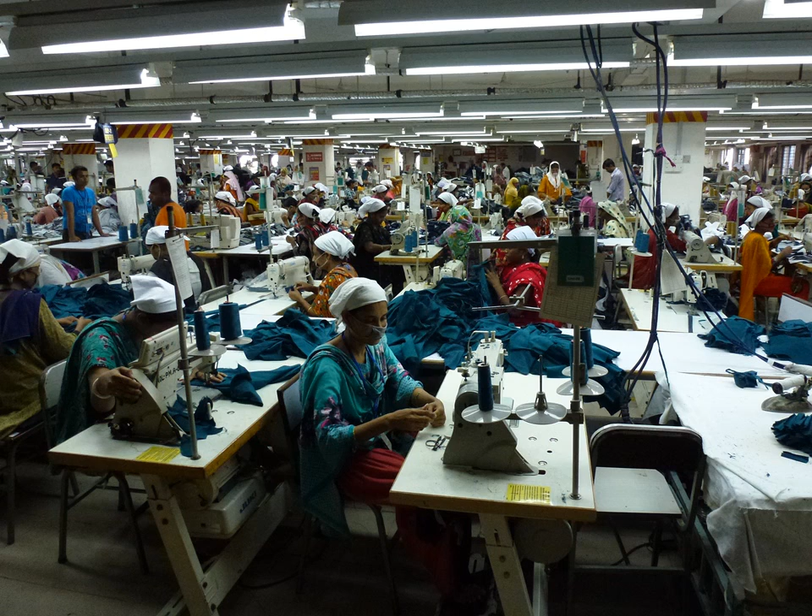The garment industry was seen by Bangladesh as a way out of the chronic poverty, and the development of that industry has really taken place at a pace which is quite phenomenal. It is now the second largest garment manufacturer in the world after China. Over 4 million people in Bangladesh work in the garment industry, mostly women. About 80% of the employees are women.

It has exports of 20 billion US dollars. So that represents 80% of the country's exports. So clearly the garment industry is absolutely fundamental to the growth and development of this nation. The biggest customer, if you like, for clothes from Bangladesh is Europe, at about 70%. The US follows after that.

Arup first became involved in Bangladesh at the end of 2012. There were a number of fires in large factories in Bangladesh, and one of our long-standing clients, Inditex, a Spanish garment company, asked us to give them some assistance and some advice on how they would go about carrying out fire assessments and assessing the evacuation from factories as a result of those fires. So we were working in Bangladesh just when Rana Plaza collapsed.

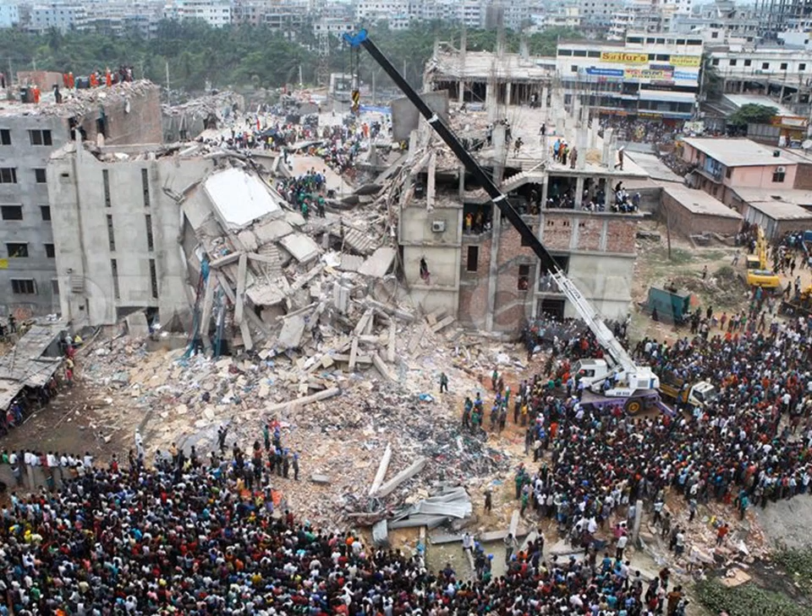So over 1,130 people were killed in the collapse, and clearly many thousands were injured. What you can see there is the remnants on the day after. You can see 4 stories. Originally that building was 9 stories. The top 5 stories were completely obliterated, and they were fully occupied during the collapse. Clearly it was a time of great chaos and mayhem and devastation for many people. It makes it one of the largest and greatest industrial disasters in the history of the world.

The building itself had multiple occupancies. At the lower levels there was a bank. In the days leading up to the collapse, there were reports of structural issues, and people heard loud noise like gunshots, and people became worried about the columns. Cracks developed in the columns, and some people were sent in to assess those. The bank workers were all sent home, and the garment factory workers were unfortunately all sent back into the factory.

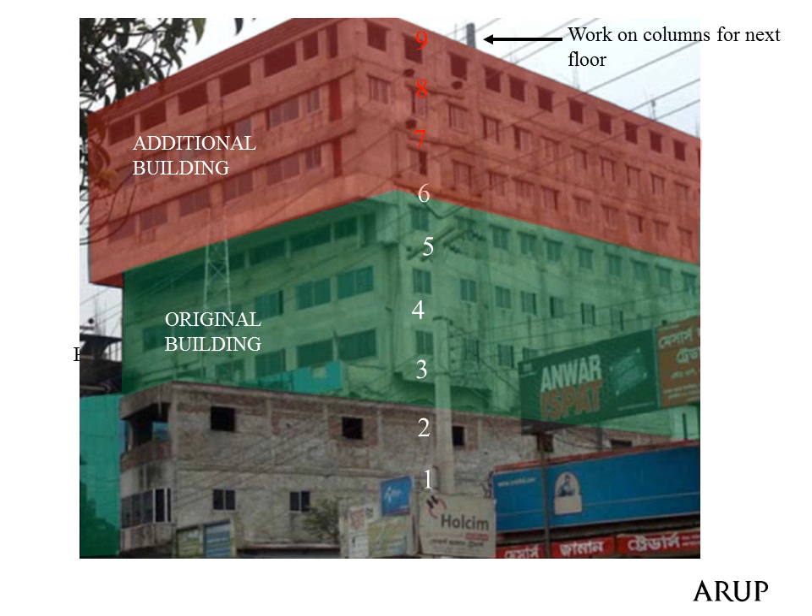So the response, and our first involvement in the structural issues, as I said, was through Inditex. You probably are familiar with Inditex through Zara and Massimo Dutti and lots of other shops that we see all over this country. And I think, as I said, they are probably the second or third largest company in the world in the garment industry.

And after the collapse in Rana Plaza, while we were already helping them on fire issues, they came to us and said, clearly we have a bigger issue here. It's not just fires. We don't know what is the structural condition of the factories where we are currently buying our garments from.

And the objective that they set us was to provide assistance. They weren't quite sure what it would be. They were very open that whatever we developed, whatever we found would be shared with all of the other factory owners and the other garment manufacturers. So we were very clear about that at the outset. And so they very much drove the agenda and the response in the post-Rana Plaza days.

Inditex were a founding member of what started off with the EU retailers, an umbrella organisation called the Accord. And it's considered by those in the know in the corporate social responsibility sphere that the reaction of the garment industry here in Bangladesh was a game changer. It hasn't been seen anywhere globally.

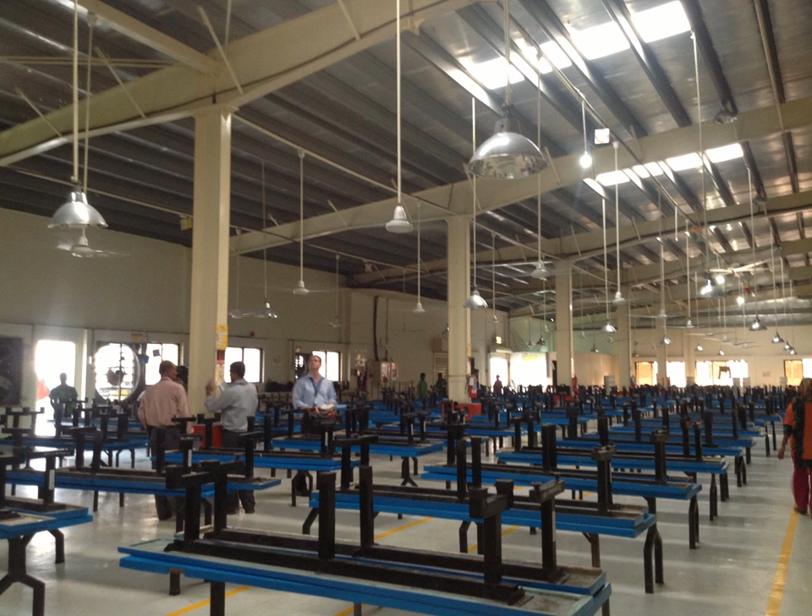There were some exceptions. There were some factories that were comprised of single or multi-story steel structures, and these were probably the exception. A very small percentage of factories fell into this category. But what we did find a bit more often was that on the roofs of RC buildings there were small, normally non-engineered steel structures. And as well as that, we found that adjacent to the main factory building there was often a steel structure that served as a warehouse or for more heavy industrial activities like the washing or the printing of linen.

So as we have seen, concrete is one of the major building materials of these garment factories, and as we began to dig into the construction of these buildings, what we found was that more often than not, brick aggregate had been used instead of stone aggregate, as we'd be used to in Ireland. And it happened for a number of reasons. One, because Bangladesh has very few natural quarries, and so a lot of the stone would have to be imported, which meant quite expensive. Another is that Bangladesh is part of the delta and had a lot of access to clays, which could be dried and fired in the kiln to make the bricks.

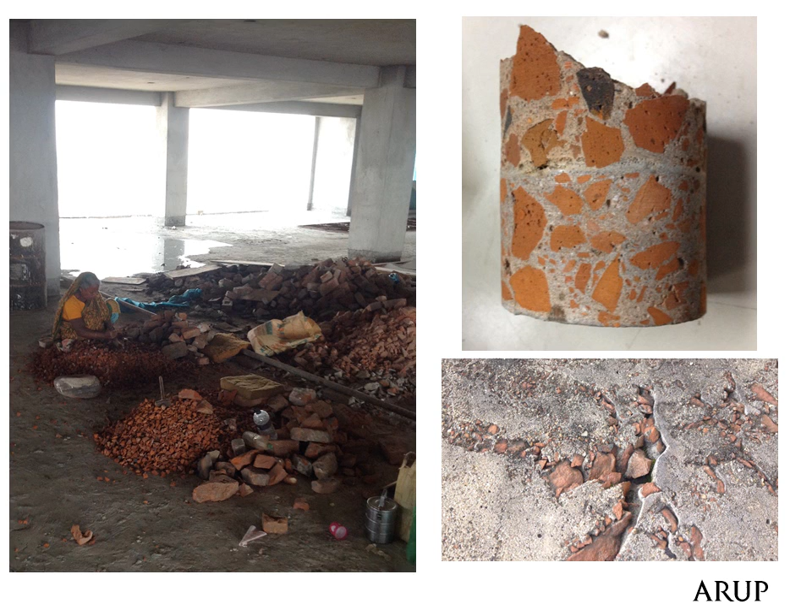Out of interest, the cylinder strength for a brick aggregate concrete was about 14.1 newtons per millimeter squared, and for stone was 16.3. So that was from our analysis, the statistical numbers that we came out with at the end. Obviously, as the project went on, we were able to revise our assumptions as we got more data from more buildings.

So our methodology then, as we developed our methodology, what we came up with was a visual plus survey. So this is mainly visual, but in addition to that, we did some calculations. What we thought was important in considering was everyday gravity load. We didn't review seismic loads because most of the buildings would have failed had we done that.

But what we decided was that columns were the critical element, for a number of reasons. Columns were the element that failed in the Rana Plaza collapse. Also, we felt that whereas beams and slabs can be a lot more ductile in their failure, columns can be quite brittle and give very little warning. So it was obviously of concern to us.

We developed a working stress methodology, and this is in line with international best practice. We were able to reduce the load factors based on the certainty that we had going into factories and seeing what was on the ground, measuring the exact depth of slabs and so on. Just to reiterate, we were really interested in the life safety of the workers in the factory. We weren't trying to make these buildings code compliant to any degree.

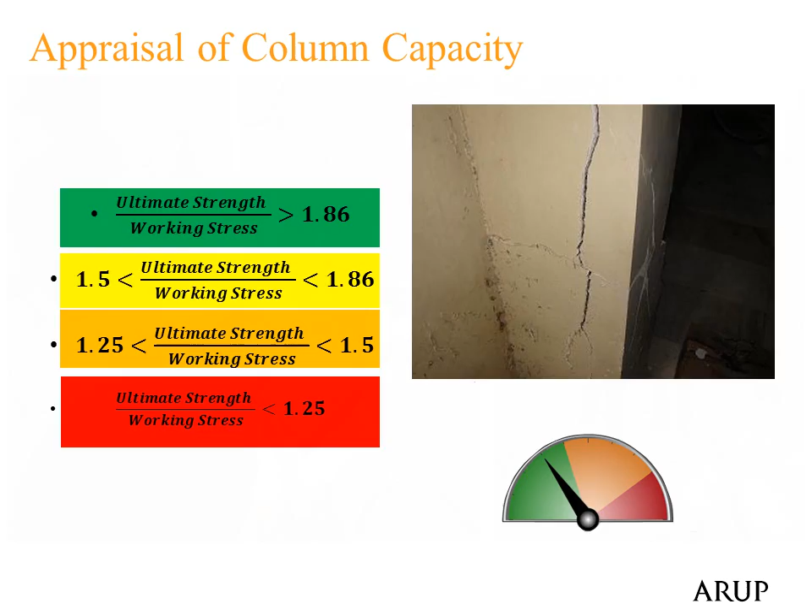So as part of the development of our methodology, we carried out some field tests on 6 factories in Dhaka. Initially, it was thought that about two factories could be surveyed each day with reports, and this quickly became very unrealistic given the traffic jams, the difficulty finding factories, and just the sheer size of some of the factories. But as we surveyed 6 factories first, we were able to upgrade and refine our methodology.

So just to talk a little bit about some of the tools that we used while we surveyed the buildings. We had a specifically designed RF Inspect app for the project in Bangladesh. This is an iPad-based data gathering tool. It basically allowed us to record all of the information that we found at one of our visits to the factories. It was particularly useful in that we were able to take pictures of floor plans and then locate pictures and notes to certain parts of that floor plan.

It was very useful because, as you see in the next couple of slides, we were doing quite a few surveys per week, and after a couple of weeks out there, they did all seem to blend into one a bit. So it was very useful to have something like this to keep it clear as we went to write the reports.

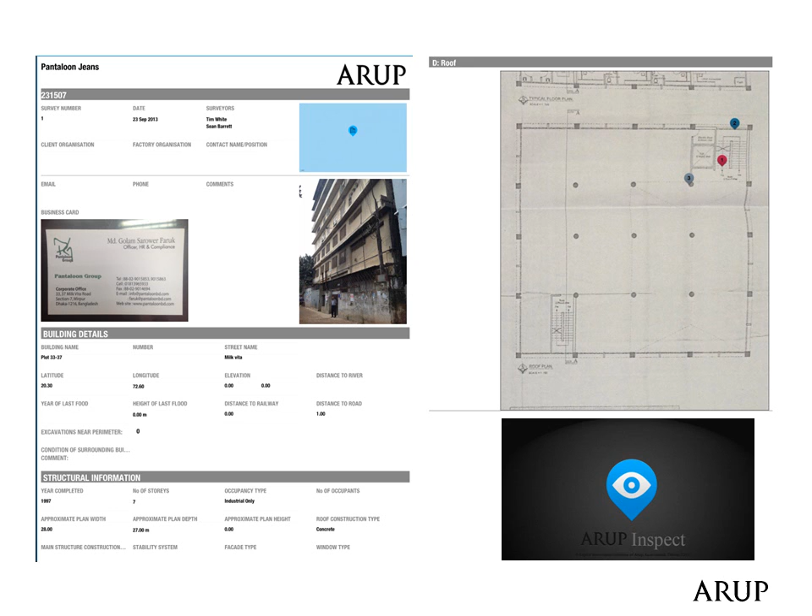So the colour coding, as we spoke about, fed into the overall colour assessment for a particular building. So the columns were one part of the colour coding, and anything else that we found from our visual inspection would have fed into this colour coding as well. So we came up with a kind of traffic light system whereby if we deemed the factory to be red, the factory must be closed immediately.

Amber was immediate action required on some part of the building, for example, empty water tanks or remove high loading from cantilevers. And yellow was some action within 6 weeks, and green was normally that the building is generally okay, and maybe some longer term maintenance issues that we wanted to be addressed.

Another tool that we had at our disposal was to call for a detailed engineering assessment, which we generally called for if the colour coding was amber or red. We called for a DEA, and this was a more in-depth study and analysis of the building, normally carried out by a local engineer.

But I suppose at the heart of the methodology was that this is a very pragmatic approach to the situation in Bangladesh. The objective was to prevent another Rana Plaza, and we couldn't go in and condemn every building based on code compliance; it would have a disastrous effect on the economy, which is vital to the prosperity of Bangladesh.

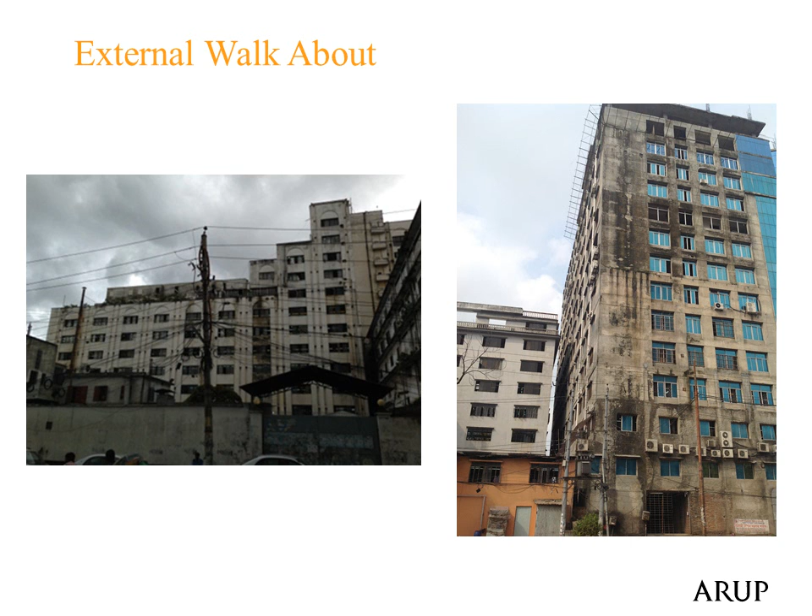We then proceeded to go up to one of the meeting rooms and have an interview with the factory manager. We generally did have to maintain a bit of a healthy skepticism for what they told us. Often they were trying to tell us what they thought we wanted to hear, but nonetheless we found it very useful. A lot of them would have been around during the construction of the building.

We also asked for any documentation that they had, so any permit drawings, structural and architectural drawings, site investigations, and so on. We got a big variation in what we received. In certain cases, we were handed a perfect set of structural drawings and the building was exactly as drawn. In other cases, the bay dimensions might have been the same, but there might have been a couple of extra bays or a couple of extra stories. And in other cases, we were given plans for a different factory down the road, so they were not quite as useful.

And again, in terms of site investigations, I was handed one one day that was dated the day before the survey took place. So we had to, again, just maintain a bit of skepticism.

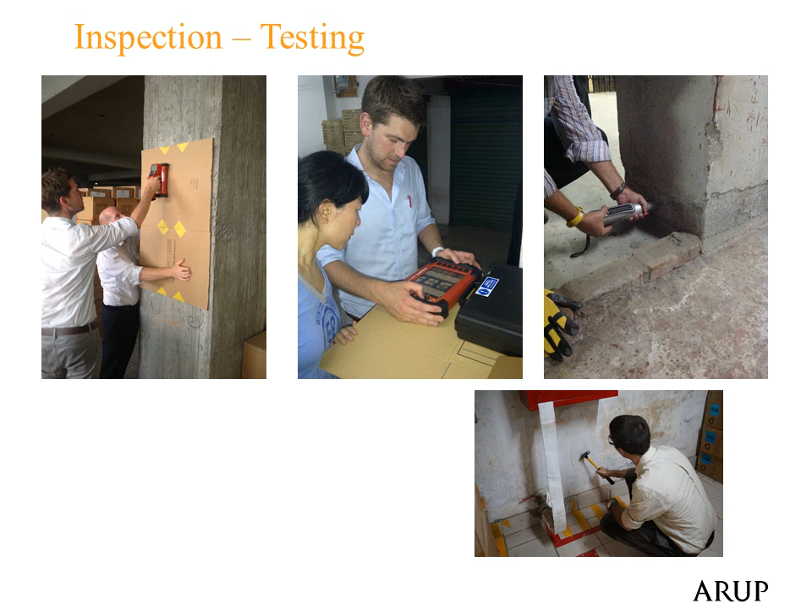So it was very important to us that these were very graphical presentations or reports. They are all available now on the Accord website in English and Bengali, so anyone with access to the internet can go and read them. And we wanted to make sure that if any layperson or non-technical person went in to look at these reports, they would be able to understand what the critical issues were.

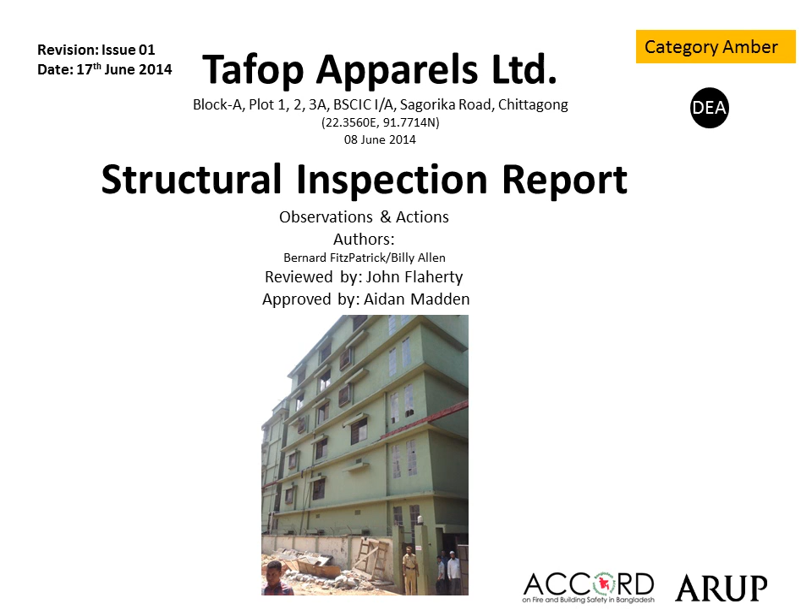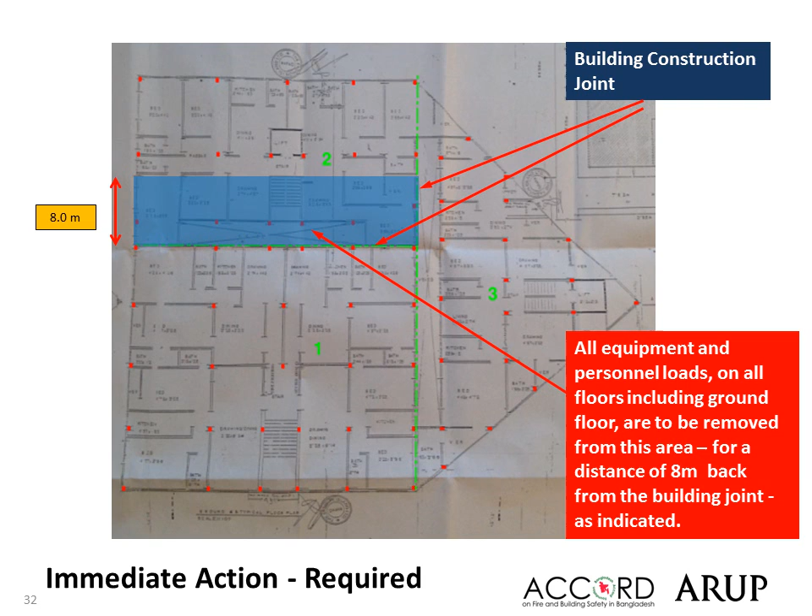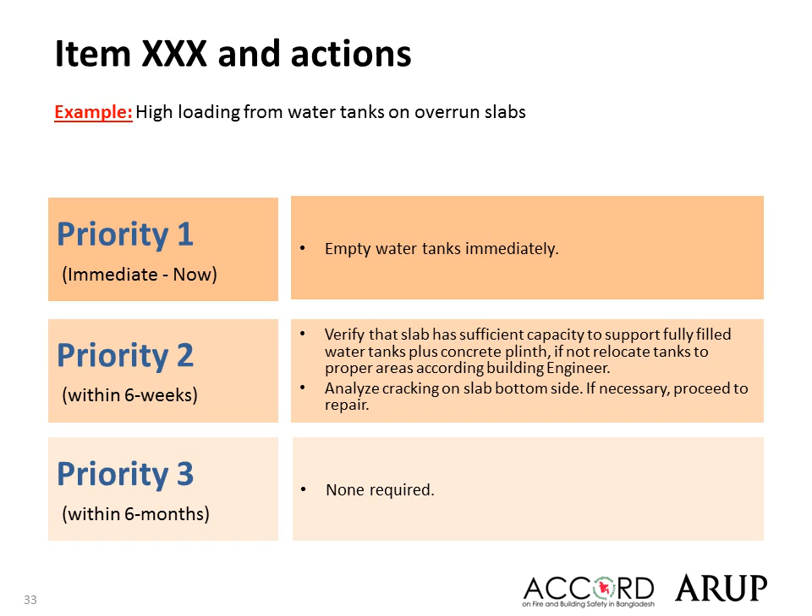So I'll pass back to Ed now to go through what we found from the project and finish up. So just to recap on the timeline, as I said, it's 2 years now since Rana Plaza collapsed. In that 2-year period, as Shane said, pretty quickly we were involved in developing the methodology. So that was in the summer of 2013.

We then went on to do around about 120 surveys for Inditex at the end of 2013, just into the start of 2014. We were then appointed by the Accord at the start of last year. And from March until July, we carried out 458 factory surveys for them. And we're currently finalising a final tranche of factories for them now. Up to today, it's 172 factories between January and today.

So it's about 750 factories that we've surveyed, that we've walked around, that we know a lot more about now than we did before. And it's been very interesting. It's unusual for us to gather so much data and to create such a big data set. And we've learned a lot from it.

And so in terms of the findings, what this shows is the overall color coding. Just think of the color coding as urgency levels, because it's all time bound. So red factories are factories that needed to be closed. Out of the factories that we surveyed for the Accord, just under 2% of those factories needed to be closed. So that's 11 factories.

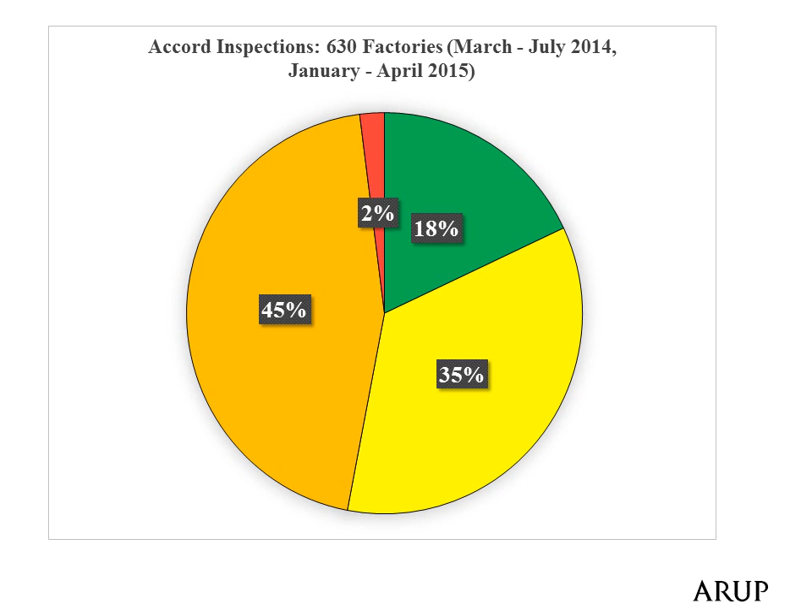And what we wanted to point out here were the key risk indicators I talked about earlier. Knowing what we know after doing so many inspections, there are certain things that, if you put them together, give a high indication that you're going to have structural issues. If a building is between 5 and 7 stories, if it's built before 2005, and in particular before the year 2000, if it's built with brick aggregate, all those things put together mean there's a high probability that building may have some structural issues.

If you add to that a factory where there are no structural drawings, no permit drawings, or they're very poor quality and not representative of the as-built situation, it's another risk indicator. And then there are 2 other associated things. What we found in many factories was that the general columns, which are just picking up floor loading from general factory areas, could be, you might say, acceptable.

But if those columns were also associated with edge cantilevers, which were not necessarily in the original design, or with carrying areas for toilets, water tanks, or, as Shane said, some of the storage areas, the denim rolls, those kinds of things, then it was as if those columns weren't designed for the loads they ultimately ended up carrying.